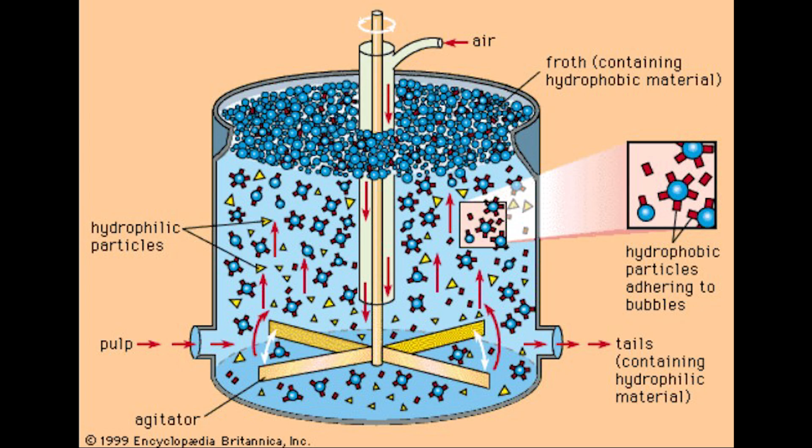Base Camp: Resource Processing, Magnetic Separators, Flotation Tanks and Centrifuges, Carbothermal Reduction, Hydrogen Reduction, Air Compressor and Cryogenic Separator, HCl Electrolysis Production Cell, Controlled Atmosphere Reactor, Nitrogen or Argon from Cryosep, Distillation Columns. Base Camp: Manufacturing Equipment, Basic.

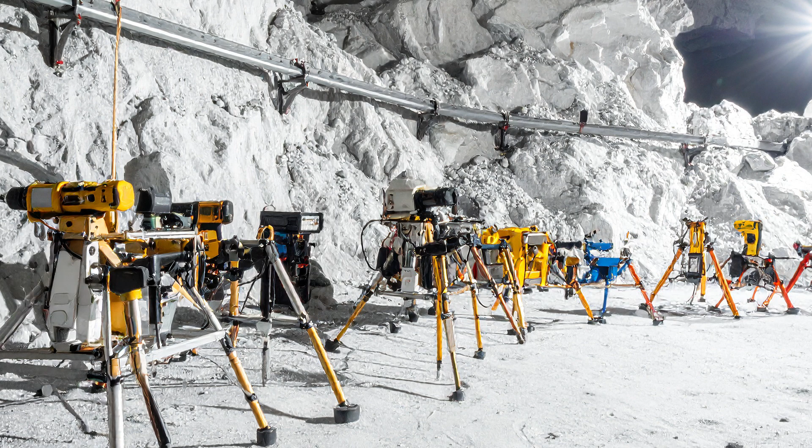Basic Machine Shop, Drills, Lathes, Saws, Laser Cutter, Engraver, Cleaners. Base Camp: Manufacturing Equipment, Advanced. Redwire Class 3D Printer, 0.1 millimeter resolution by 50 cc's volume, plasma coating, electrodeposition, flame spraying, etc. Electrospinning rig with rotating collector.

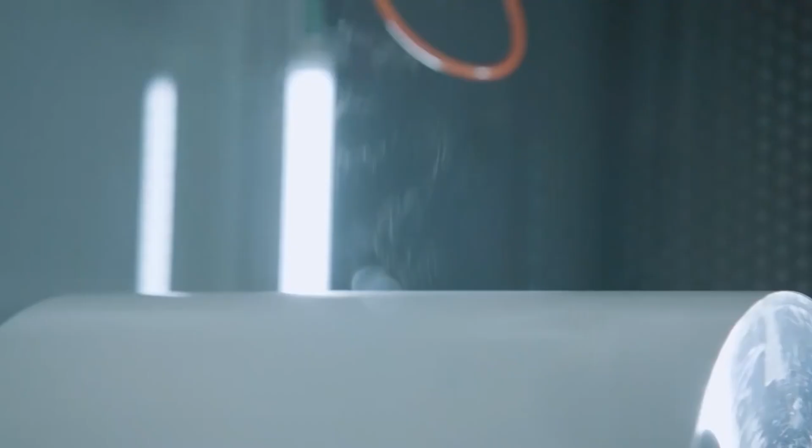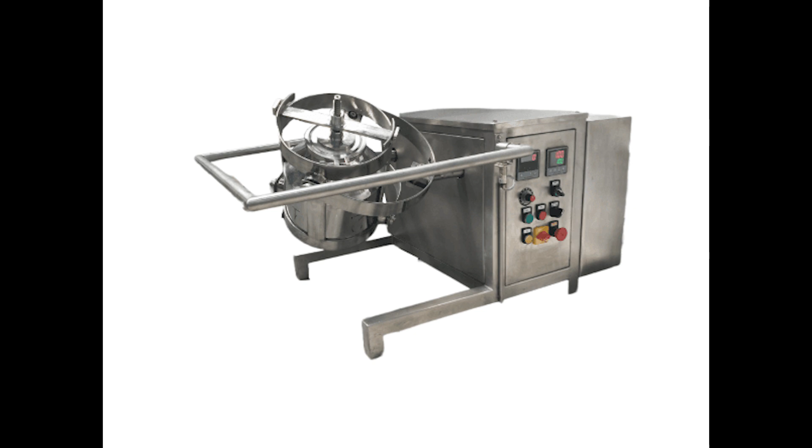1600C capable ceramic furnace. Precision grinders with diamond and silicon carbide wheels. Mixing, tumbling, and polishing chambers. Compression molds and jigs. Pultruder tooling for fiber and silicone resin. Ball mills with ceramic grinding media. Water purification and recycling system. Atmosphere management system. Laser metrology system. Materials handling: 2 Tesla bots.

Construction equipment: Cybertruck style platform with attachments to convert or transform into various types of construction equipment such as bulldozer, excavator, skip loader, etc. Design and specifications.

M100ST robot. Mass 407 kilograms. Body length 1.5 meters. Body outside diameter maximum 36 centimeters. Body outside diameter minimum 10 centimeters. Body inside diameter maximum 15 centimeters. Body inside diameter minimum 8 centimeters. Power: 1000 psi compressed CO2 in 24 fiber-reinforced tanks.

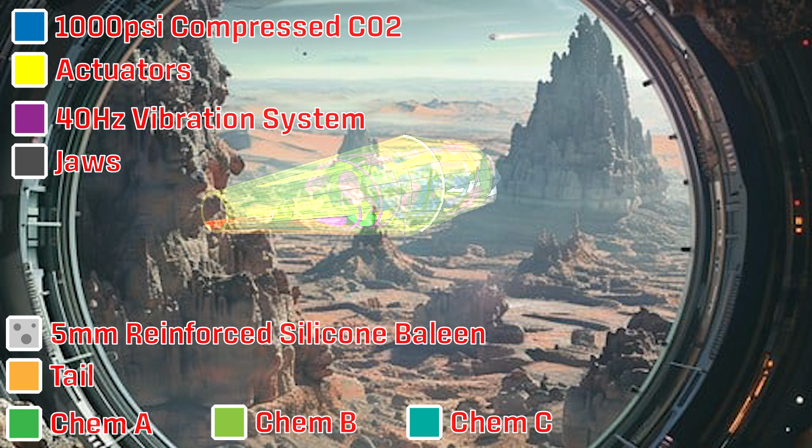Drivetrain: pneumatic gear motor actuation, basalt fiber-reinforced silicone synchromesh cable drive. Propulsion: 6 bidirectional synchromesh actuator arms. All systems joints protected and sealed with silicone foam. Control system: pneumatic and mechanical logic. No semiconductor manufacturing is available on Mars.

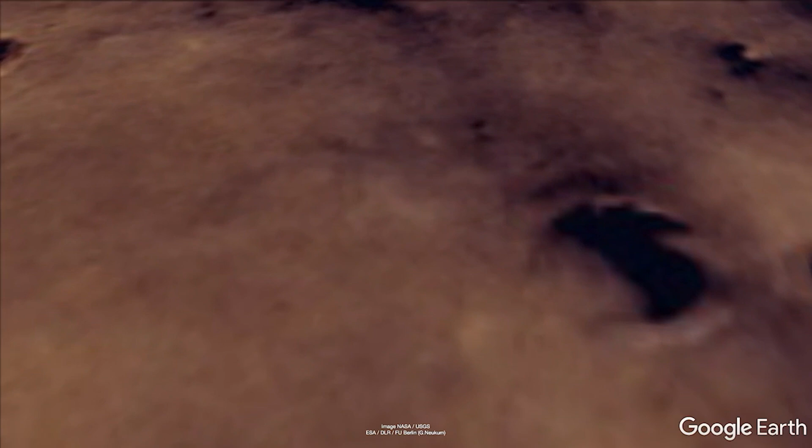Description: the first requirement of survival is not food or water, but shelter. The harsh surface of Mars features near vacuum CO2 atmosphere, up to 78 km per hour abrasive sandblasting, and 233 millisievert radiation frying. However, the Arcadia Plains feature wide areas covered with loose regolith, perfect for building. The M100ST has several variants.

Let's start with the M100STF, the foam liner. First, the 155 Mars kilogram robot is towed into place with a suitable vehicle, such as a Cybertruck, and placed on the ground. The M100STF then uses its mass in conjunction with worm-like twisting motion, 40 Hz vibrating ceramic scales, and a bit of compressed CO2 to liquefy the regolith and burrow in.

Once completely buried, the M100STF moves forward about 30 to 50 centimeters while opening and closing its jaws, which have been modified with a baleen-like fiber-reinforced silicone screen. This only allows 5 millimeter or smaller regolith particles to enter and travel towards the tail. Executing a twisting motion, the screened regolith is moved and tumbled toward the tail.

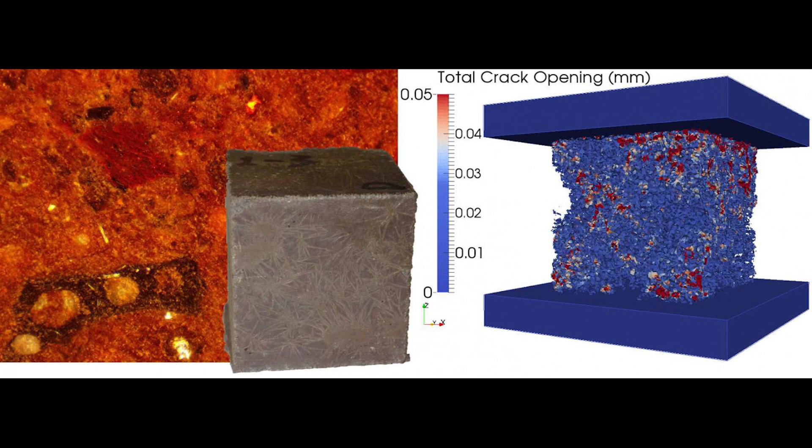3 tanks use compressed CO2 to spray materials on top of the mix while it is being tumbled. The tanks have normally closed gravity-operated valves, only opening when within 30 degrees of 12 o'clock. Tank A sprays an aqueous solution of 8 to 12% perchlorates with 4 to 6% silicone polymerizer foaming agent. Tank B sprays a mixture of 3% iron and pozzolana powder. Tank C sprays reinforcing flake filler.

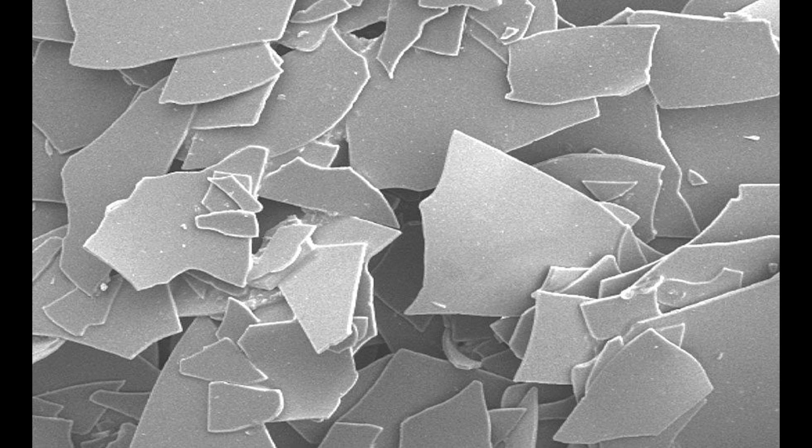The resulting mix is extruded out the tail orifice in a circular motion, foaming and expanding in the near vacuum of Mars, sealing off a cylindrical section about 30 centimeters in diameter and 50 centimeters long. The cement foam then self-pressurizes and seals off for cure. The tail continues moving in a circular motion, working the foam against the walls for about 1 minute, then relaxes to center position. After full cure, the M100STF moves forward another 50 centimeters and repeats the process.

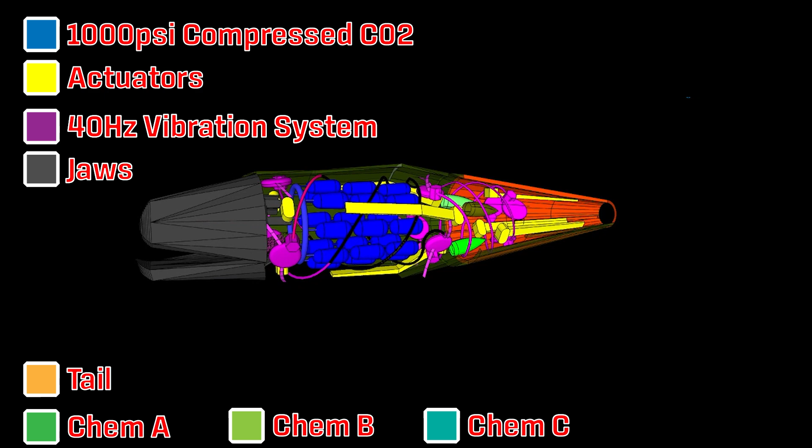Teams of M100STFs can thus preform large sections under the regolith. After full cure, these ready-made cement foam sections are then cut open, cleared, and built up to final desired condition. This brings us to the next variant, the M100STM. In this mode, the jaws do not have the silicone baleen, and tanks A, B, and C are loaded with

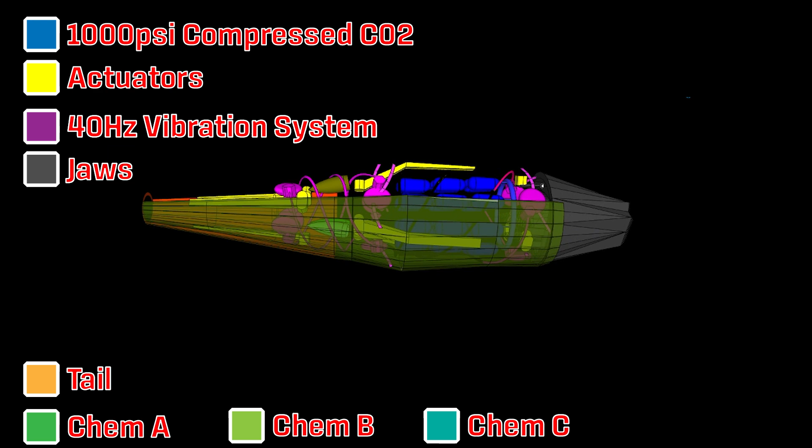different ingredients. Tank A now has 15 to 20% perchlorate solution. Tank B, 60% volcanic glass, 30% iron powder, 10% crushed plagioclase. Tank C, short chopped basalt fiber. Thus, the M100STM functions as a portable fiber-reinforced concrete mixer extruder. Just add regolith.

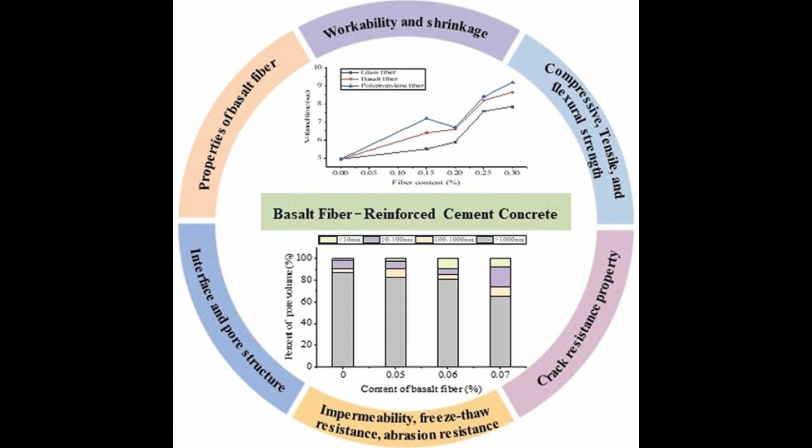Martian concrete outperforms Roman concrete, and indeed, Arcadia cement and self-sealing cement foam, along with methalox fuel, are exported from Mars and used all over the system. The third variant is the stripped-down M100STE, which basically is used as an excavator or conveyor belt, using pressurized CO2 and 40 Hz vibration to liquefy and propel scooped regolith or other loose materials through itself and out the tail.

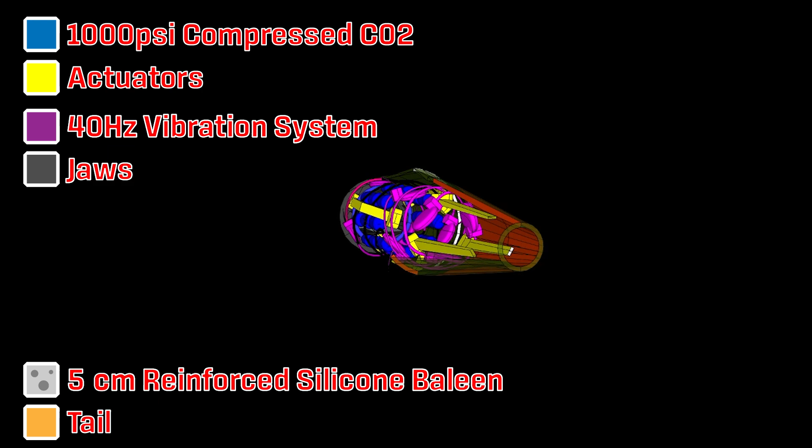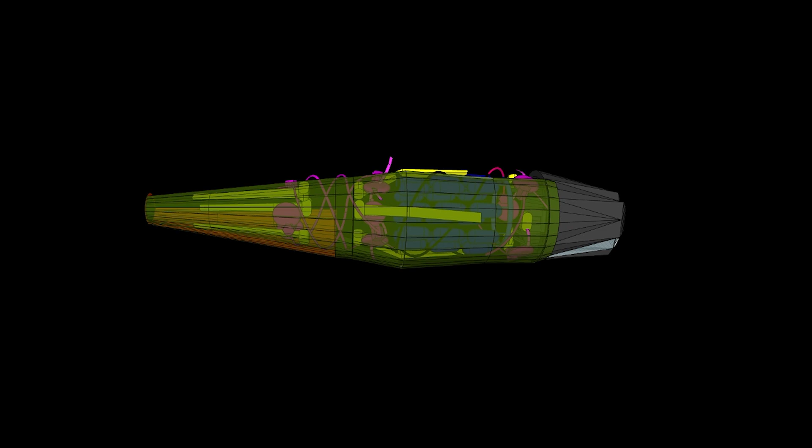The M100STE is equipped with a 5 centimeter fiber-reinforced silicone baleen. Rows of M100STEs can be daisy-chained to cover long distances, acting like conveyor belts. In conclusion, the M100ST series robots, aka the sandworms of Mars, are a critical component not only of Martian infrastructure, but Martian exports as well.

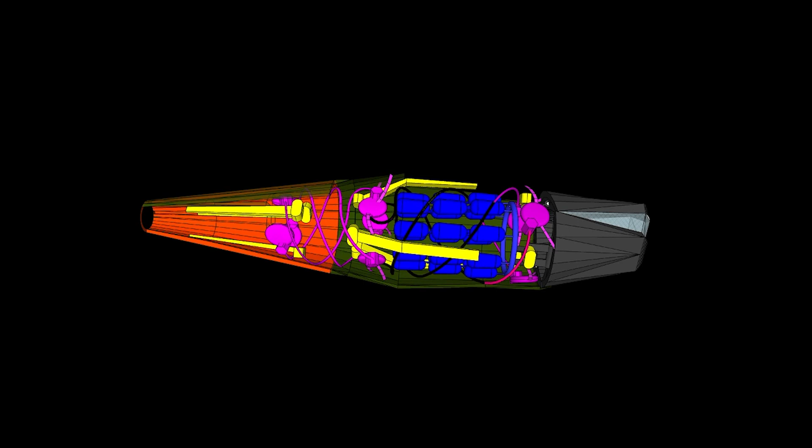Martian rotovators put shipments out for delivery. Arcadia cement and self-sealing cement foam are valued for their ability to self-seal, self-pressurize, cure in vacuum with little or no gravity, high strength, radiation resistance, and corrosion resistance, helping to build orbital habitats and other structures throughout the system.